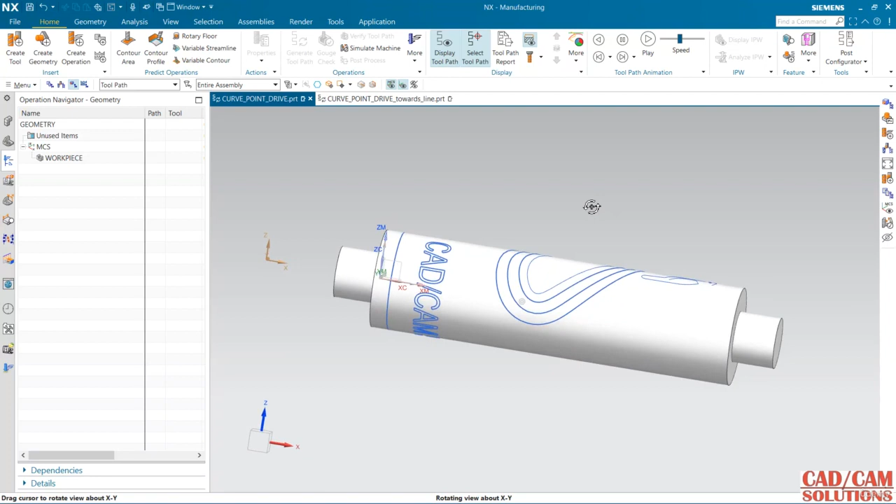Hello friends, in this lecture we will see curve point drive method in 4 axis, and we can do in the same way for 5 axis as well. This curve and point drive method is available in multi axis.

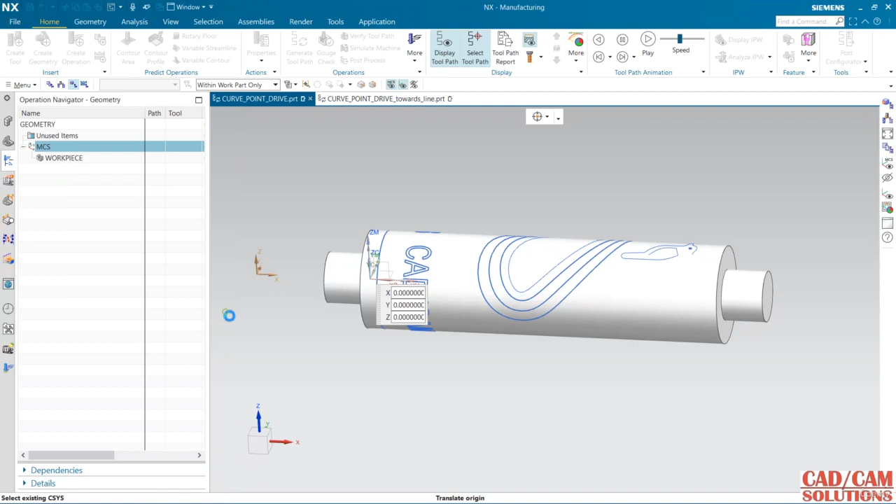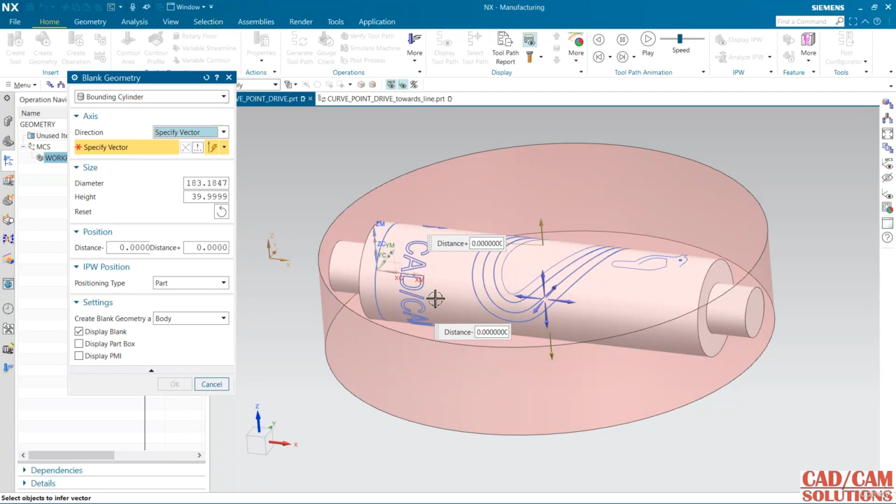So first of all, for this MCS, my Z is in up direction and X is along the axis, so fourth axis will be A axis. So I'm going to use this same MCS, and first I'm defining my part. So this is my part, and blank I'm using bounding cylinder, and my axis is this along X, and reset, and I'm just defining the offset.

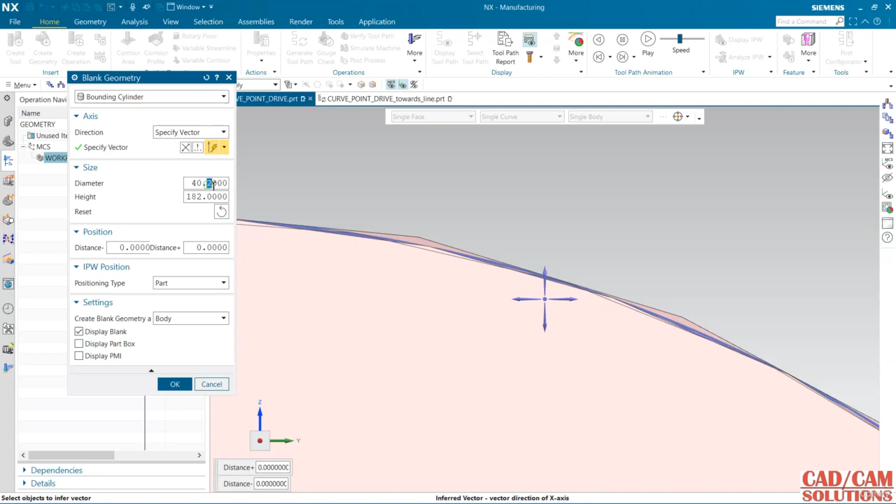Diameter is 40.2. The thickness is a little bit extra, so this distance it will cut, 0.2 is a thickness, because my tool will work over this curve.

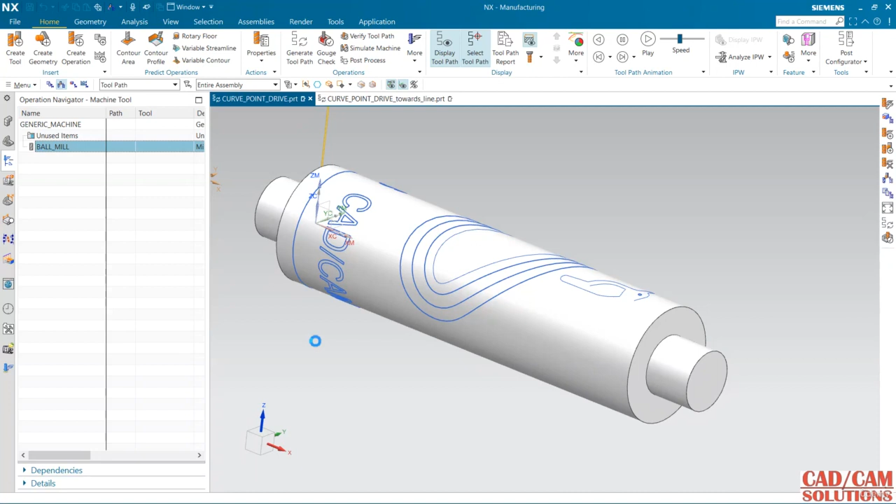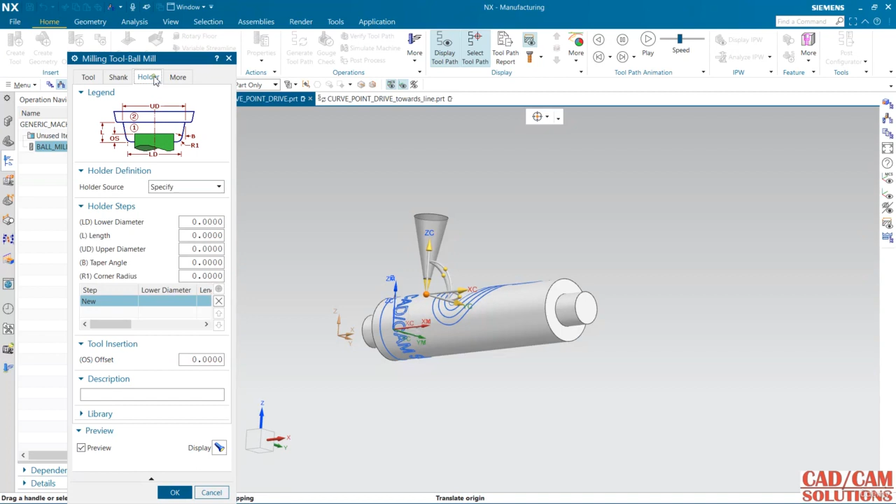Show blank, I don't want to display this blank. Now tool, I'm using a ball mill. Double click over it, and the tool is a taper angle, flute length, and length, and I'm adding a holder. Go to this library and you can retrieve the holder from this library. So this is my tool.

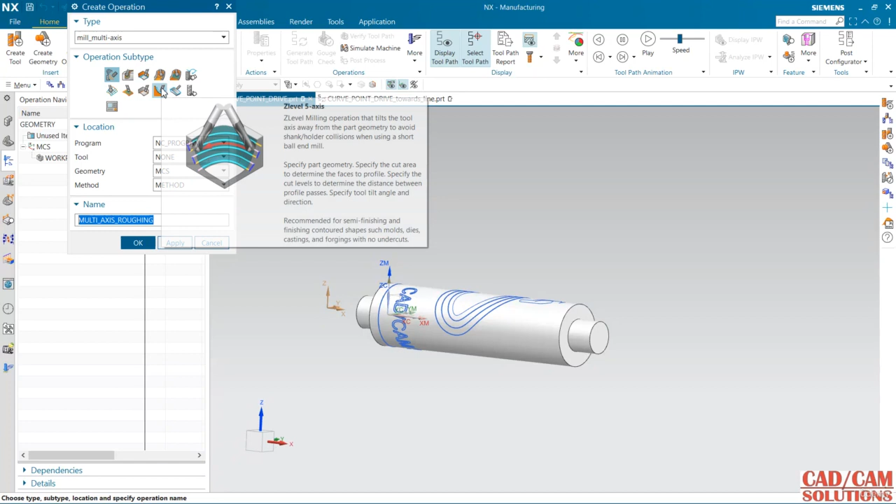Now from create operation and this multi-axis, I'm using variable contour, these are for the tube so we will see this. I'm going to click this one. We can change from drive, my program location is folder, and this is my tool. Workpiece is this, and my method is finishing.

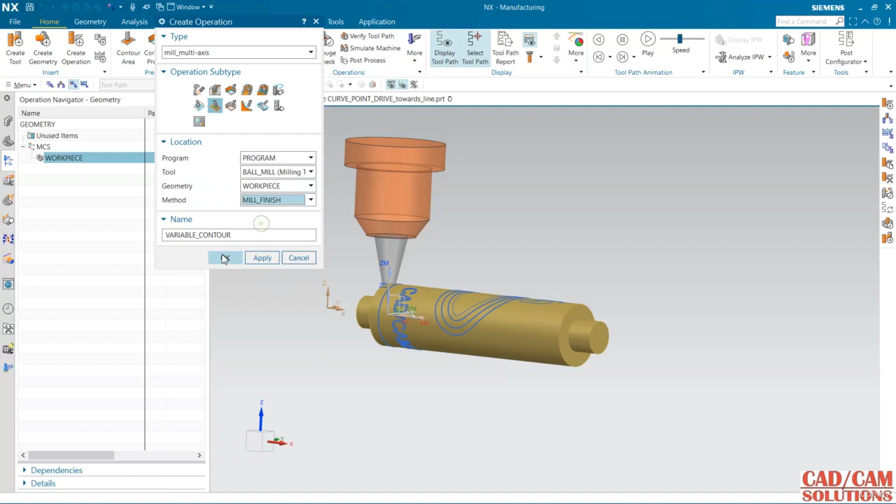Now here we have to define, I'm going to define my cut area. So this face is my cutting area. And from this drive method I'm using this curve point.

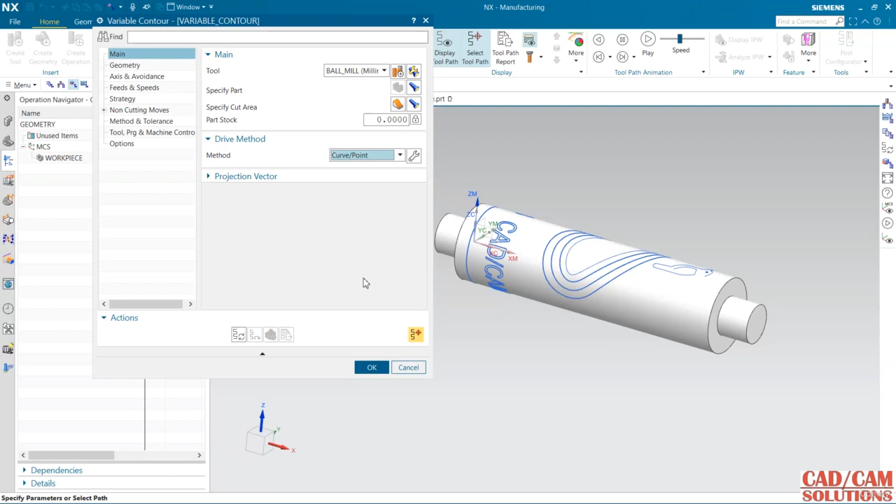Now select the curve, so my curve is connected curve. Select this and add. Second, add. This third, add. And the fourth one, add. And I want to add this one also, a small circle is there. Now okay.

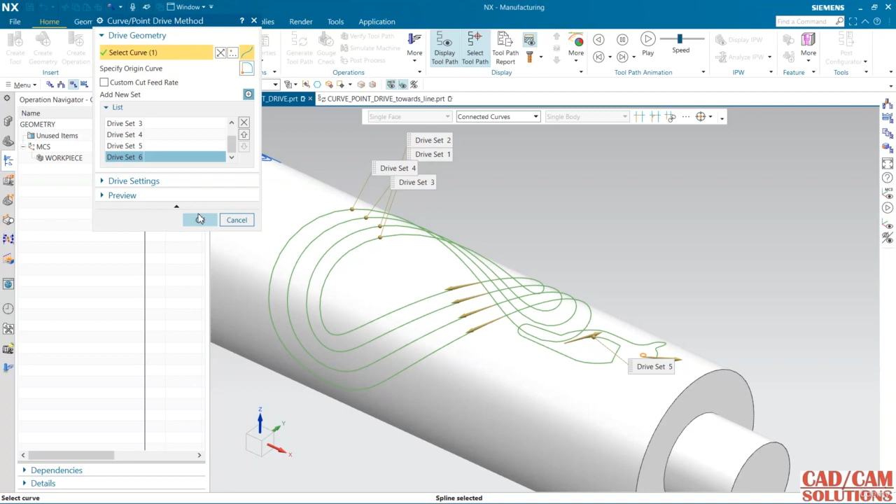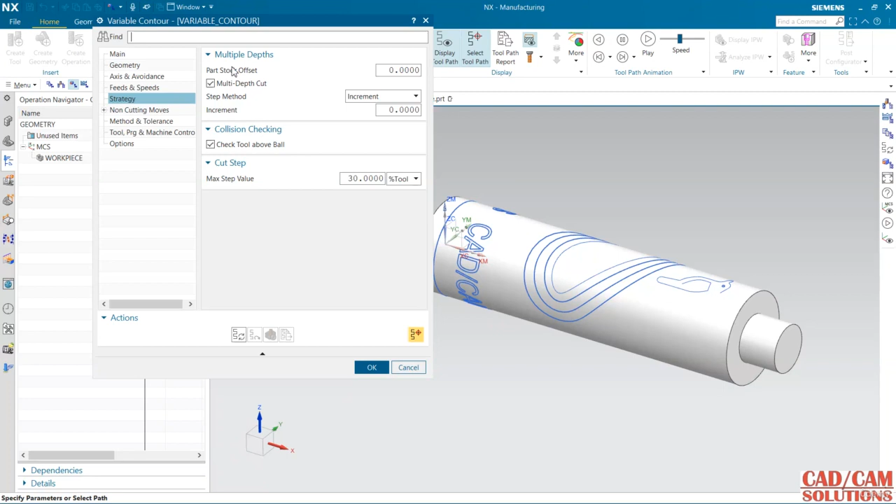And projection vector will remain same for the tool axis, and my axis is normal to drive. My drive surface is this outer cylindrical surface, and for strategy no need to change, it is okay. Tool I have already selected. Strategy, if you want to add the multiple depth, that time we can use or generate it.

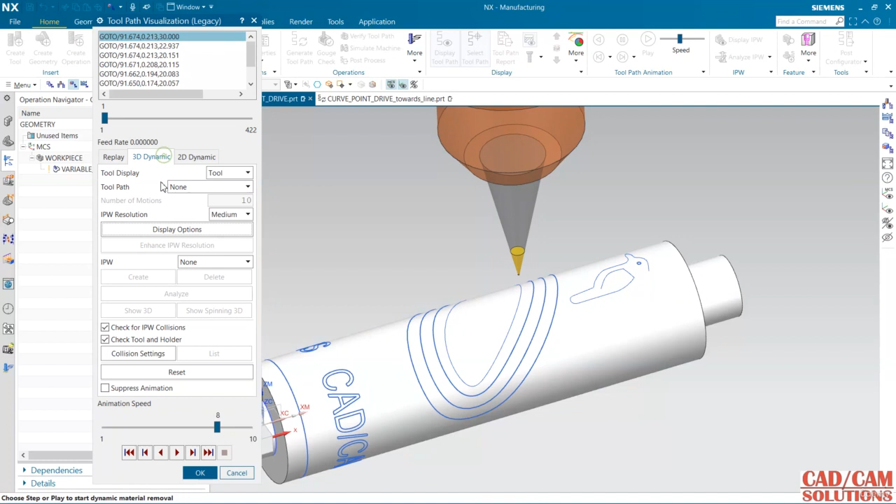Okay, and verify it. It's a little bit slower. And in 3D dynamic, it will work over the curve.

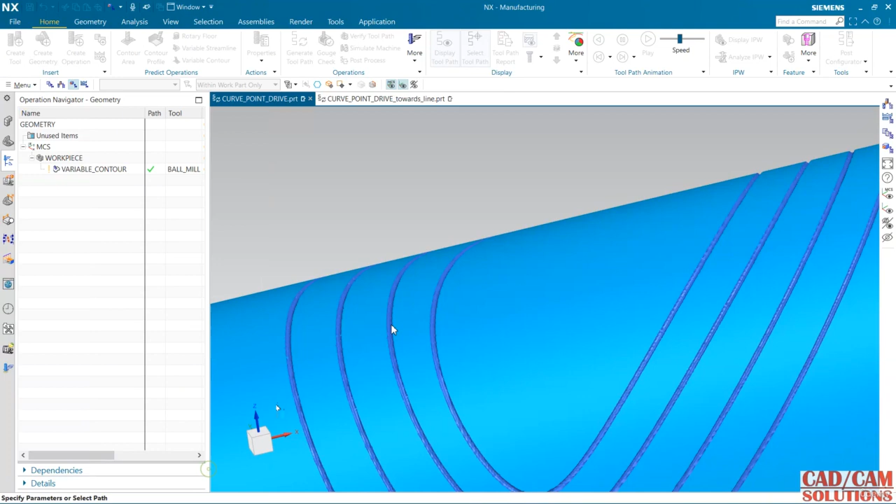So this material is cut only 0.2 mm, which we have defined in blank. Click OK, and again OK.

And I want to create this same for this text. I have created this text and place over this face, and under curve we have text, so I have used that curve, that text. So create operation on the same, I'm using all the parameter.

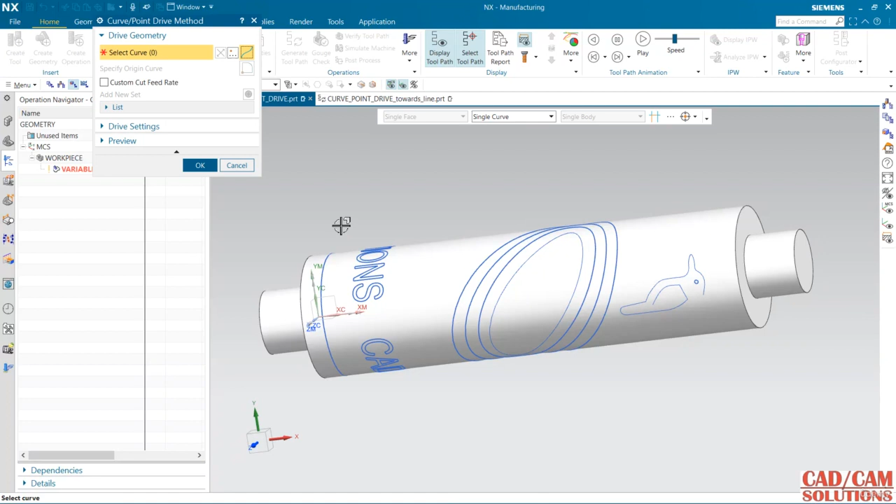My cut area is this, and change it to curve/point, and my curve is this.

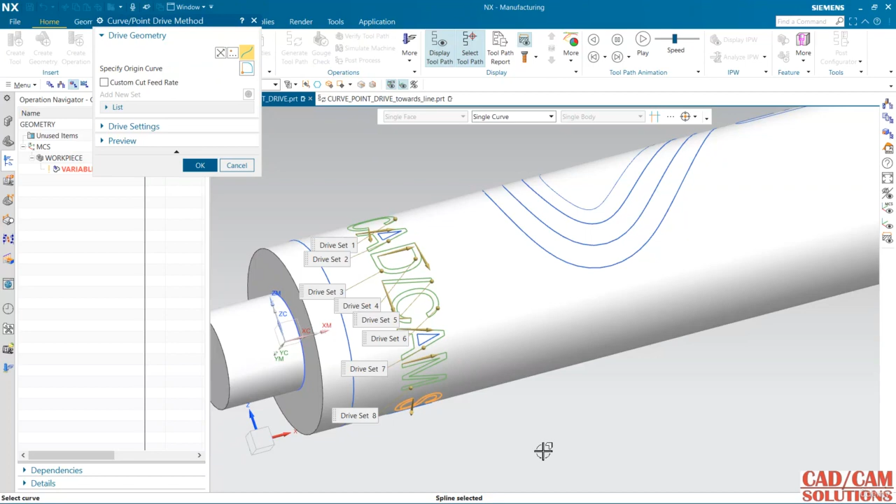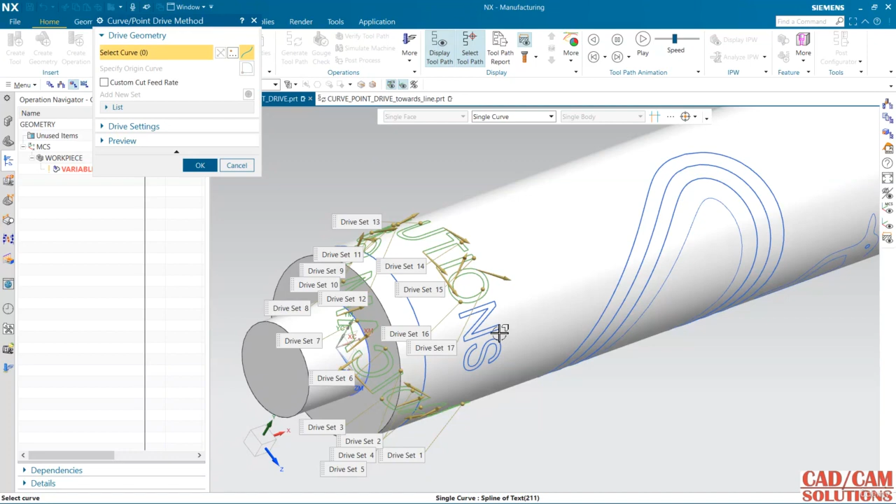Add second curve, middle click to add new set. Use middle button to add new set. And one more curve, add, and I want this curve as well.

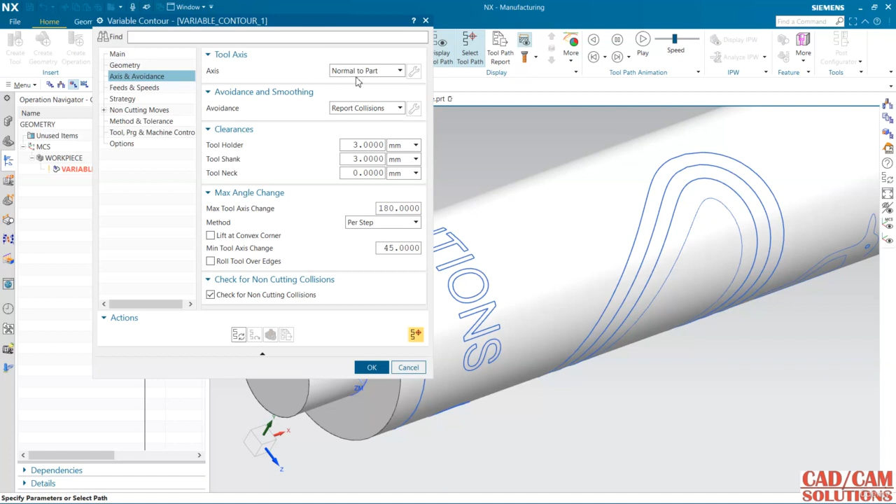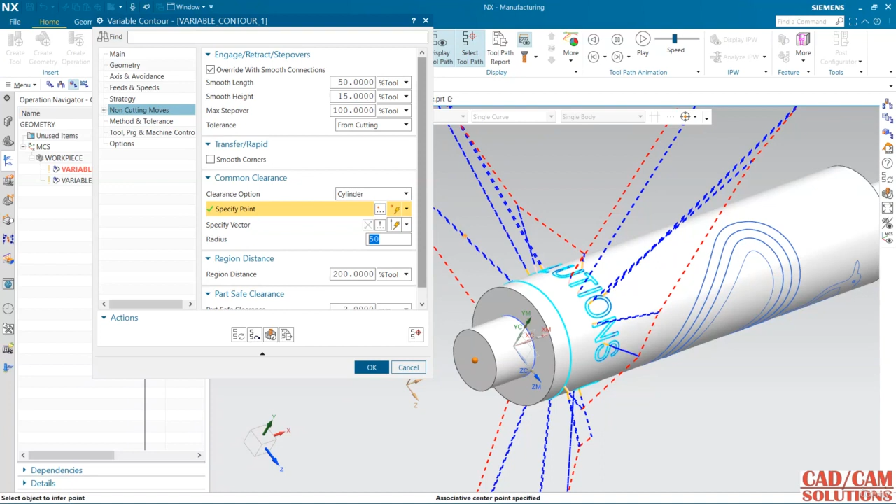And see, the non-cutting move is very irregular. So for non-cutting move and common clearance, I'm using a cylinder. Select this cylinder, and center point is this, and radius I'm using 50, and my vector is this. See, it is big, so 40. Look, this circle is my retract value.

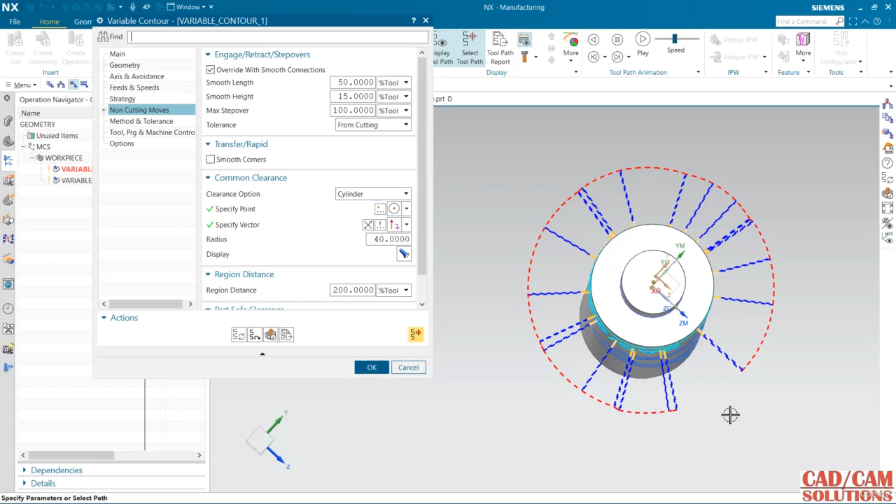Generate. So see, this is the 40 radius. And let's see this preview. Now play it.

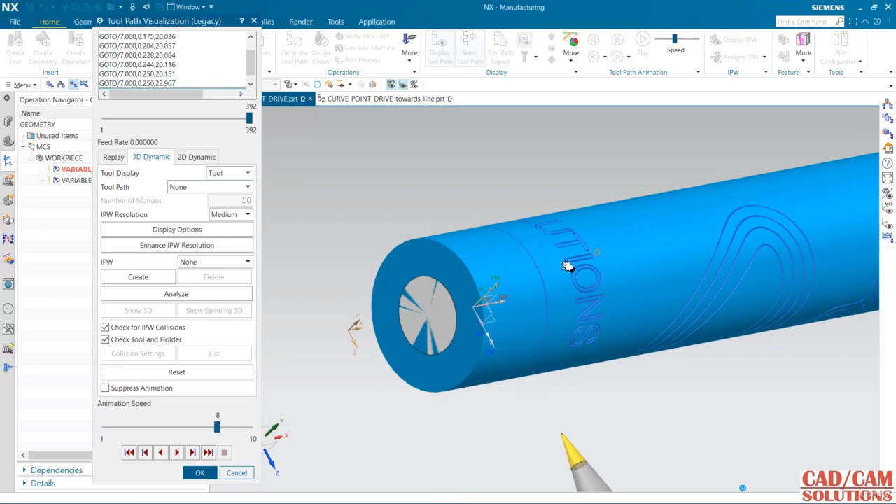So this is the curve point drive method for multiple axes.

Now I want to add the machine, so go to this machine tool view and right click over this generic machine and add it, and retrieve machine from the library. Click here, and I want milling machine.

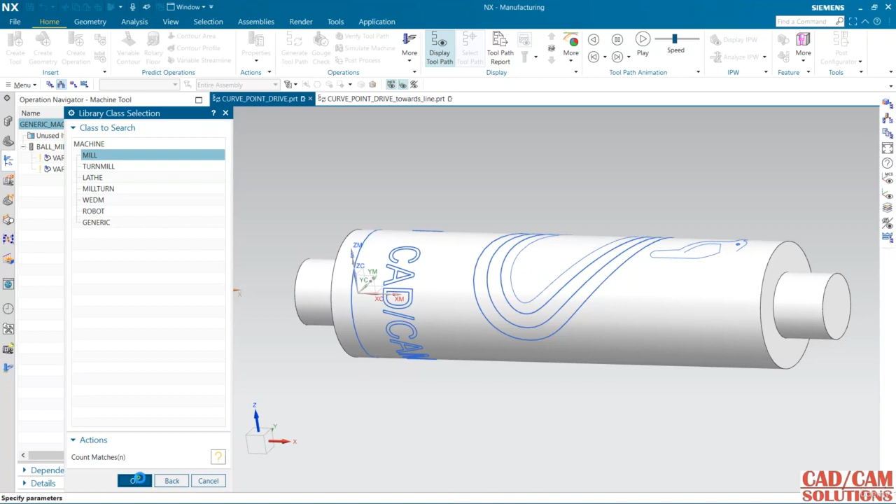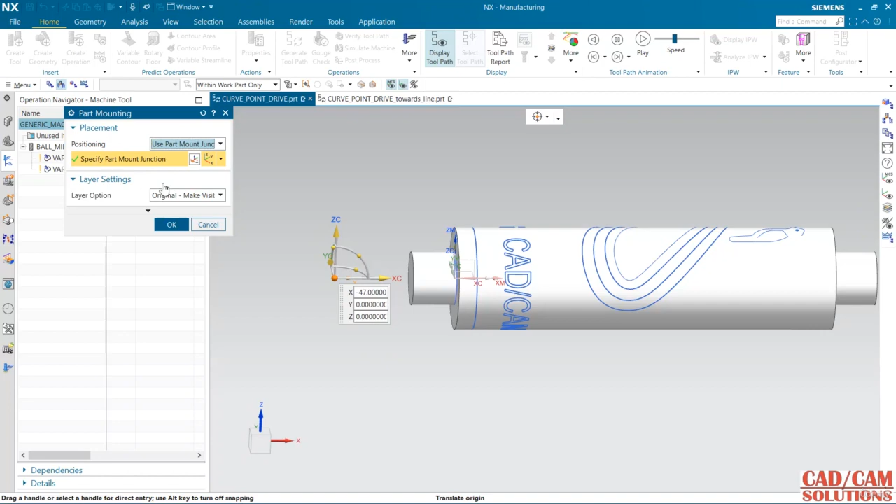And I'm using 4 axis milling vertical A table. So my fourth axis is X A, so I'm selecting this one. And you can assemble it, as we do in assembly, we can do same placement method in this, and close it, and okay.

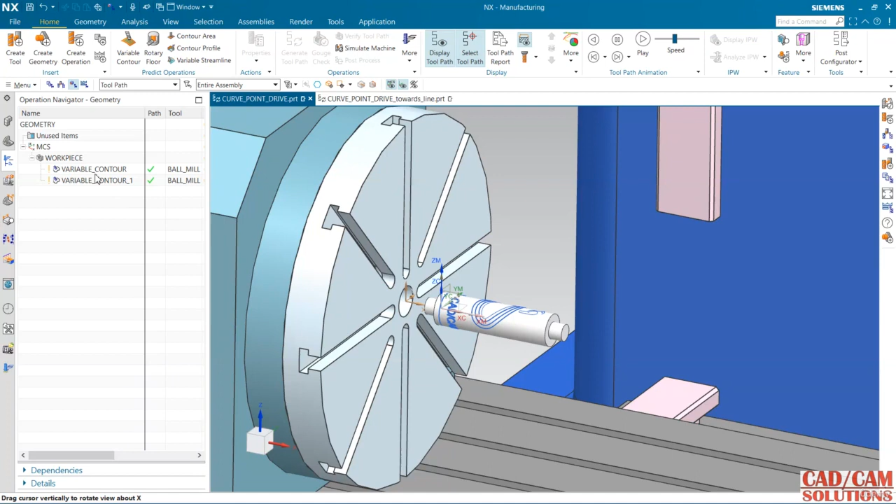So this is the machine, and it is properly placed here, and see, my tool is on work piece. Now select the operation, this is my operation, and simulate machine. See, here we have X, Y, Z and A axis, and play.

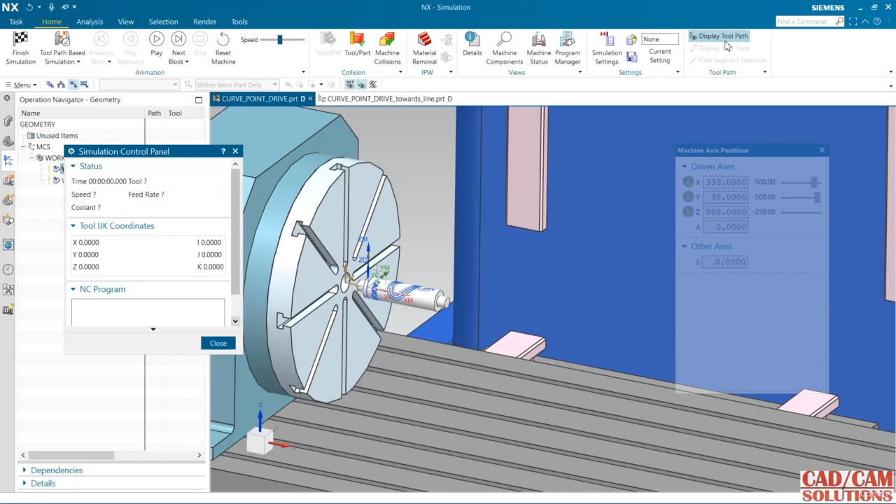Okay, the tool path is not visible, so just stop. Reset machine. And if you want to use this material removal, we can add this, from here we can show this display toolpath. So toolpath will display, and now play. Okay, it is working, my A is moving.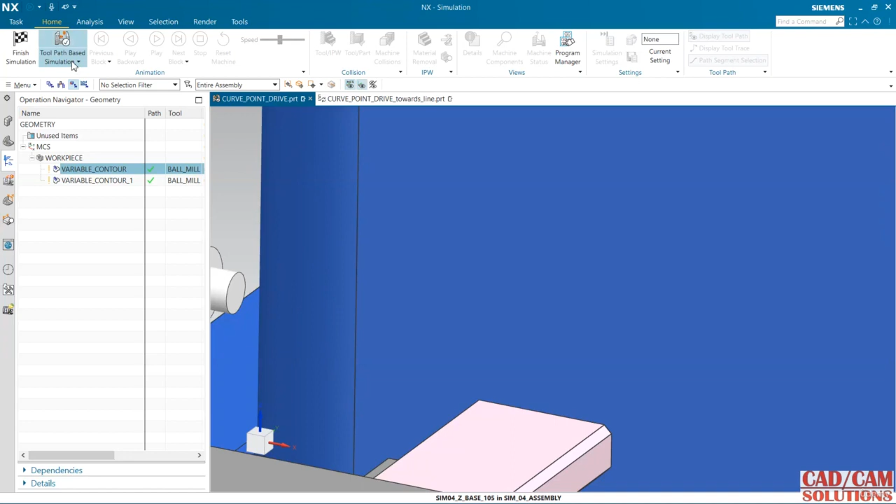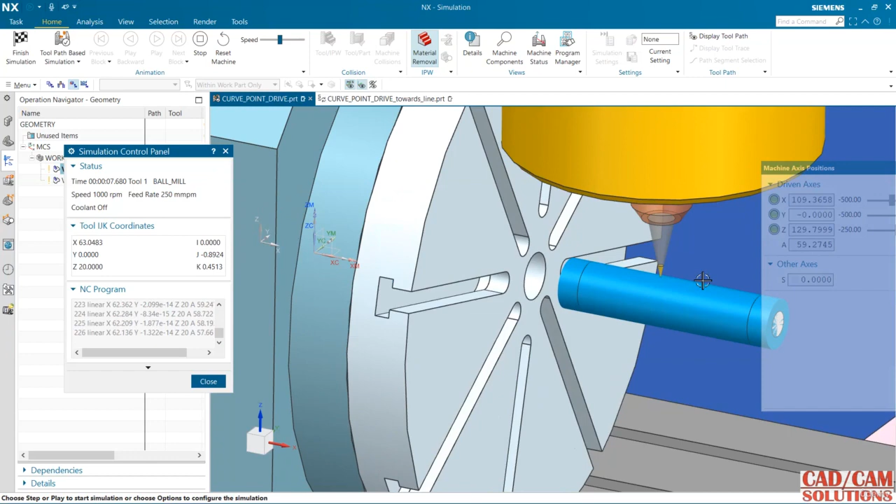Now I want to reset this. Click this one, and here machine simulation. Here we have material removal, if you will enable this and hide this display toolpath. Now I'm going to play. See, it is cutting, material is removing now, X, Y, and Z. And see here my NC programming is like this linear and this type.

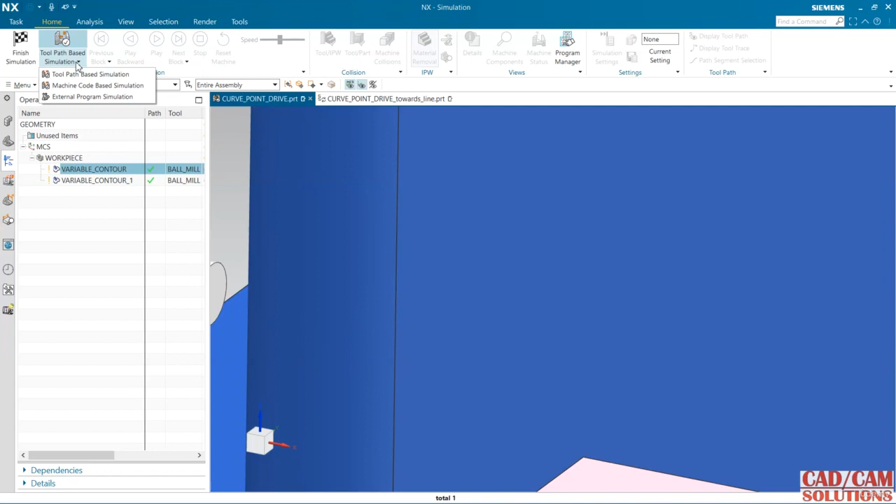So just stop it, close, and this my method is tool path based simulation, and I want machine code simulation. So first I'm going to generate the CNC program for this operation. Click it and post process, and this is my post processor.

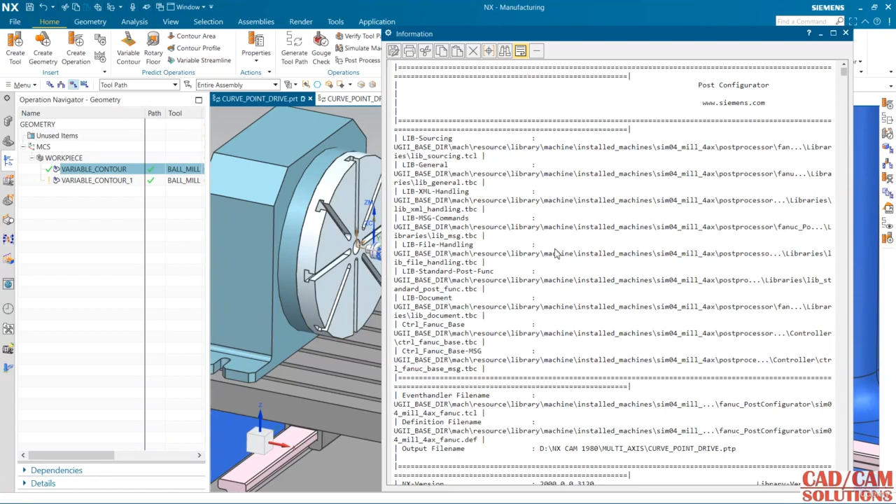This is tool path program, this is CNC programming. Now close it, first you need to generate.

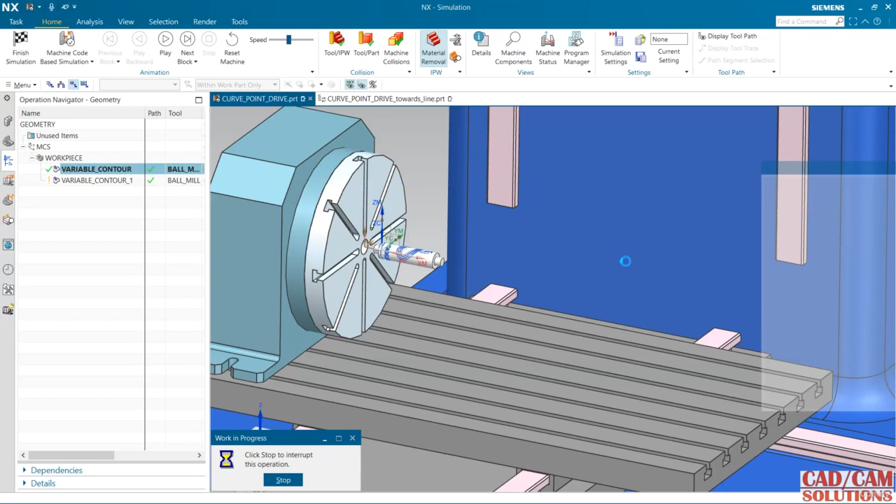Now I'm going to this machine simulation, and here I'm changing this to machine code based simulation. Now that CNC program will come in this window. Here it is, NC program. See, this is the program, CNC program, and display.

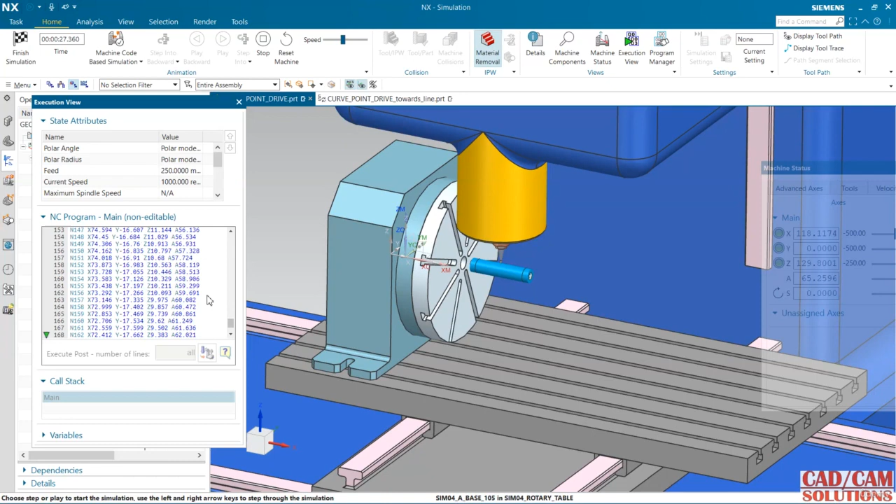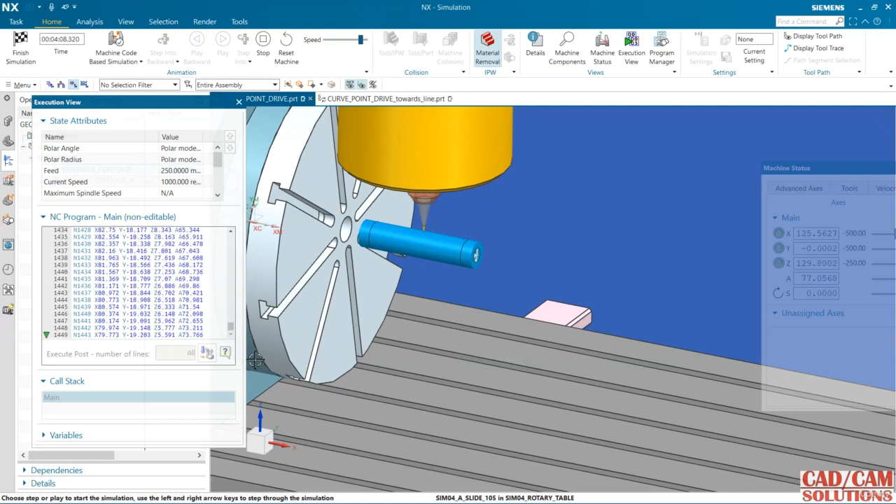It is working, and here which block it is working you can find here in this CNC program. Here is the speed, you can increase the speed of this simulation. X, Y, Z, and A.

My stock is a little bit smaller, so this holder is clashing with the chuck. No problem, just increase this blank, and if you want to see the clashing, you need to switch on this machine collision. It will show you what other parts are clashing. So hope you understand this operation.